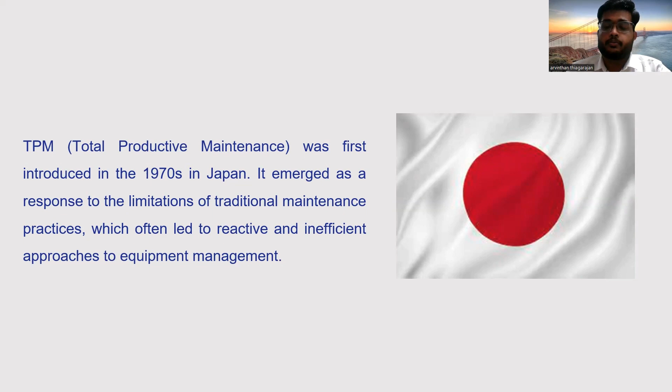TPM, total productive maintenance, was first introduced in the 1970s in Japan. It emerged as a response to the limitations of traditional maintenance practices, which often led to reactive and inefficient approaches to equipment management, causing inefficiencies in production processes.

TPM gained prominence as a key element of the Toyota production system, renowned for its lean manufacturing principles. One of the early adopters of TPM was Nippondenso, now known as Denso Corporation, an affiliate of the Toyota Group. Nippondenso played a pivotal role in developing and implementing the concept of TPM in its manufacturing facilities.

They adopted the concept of TPM, which replaced their traditional methods, and this concept gained several advantages for the Toyota Group of companies, which saw increased efficiencies. This TPM concept was then renowned by many other markets in Japan, causing increased efficiency in their business, which made many parts of Japan adopt this concept, which was then also adopted globally. The methodology spread across various Toyota Group companies, eventually gaining traction and recognition worldwide.

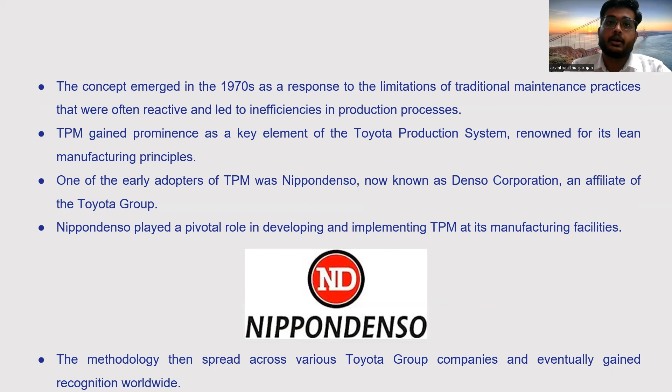So what is total productive maintenance (TPM)? Let me dive deeper into the concept. TPM is a comprehensive approach to equipment maintenance that aims to maximize the efficiency and effectiveness of production machinery. Its primary objective is to eliminate losses related to equipment and machinery by fostering a proactive and participatory maintenance culture throughout the organization.

TPM involves participation of all levels, from top level to the down level, where every individual plays a key role. Instead of relying solely on specialized maintenance teams as in traditional maintenance practices, TPM involves all members of the organization in equipment upkeep, from top management to shop floor operators. It includes everyone, not only a particular group or particular players in the company. This approach aims to create a sense of ownership and involvement at all levels, fostering a collaborative effort to enhance equipment reliability and effectiveness.

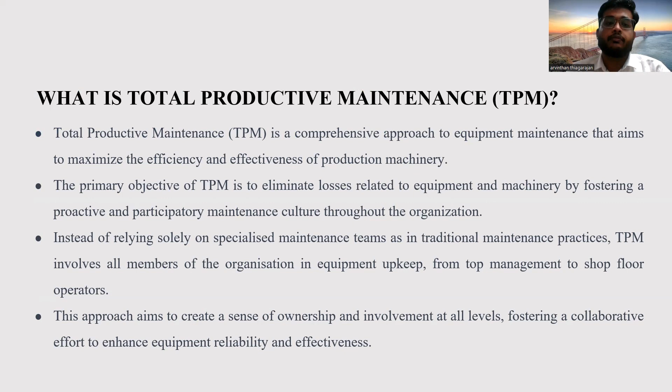TPM is structured around 8 pillars, each addressing specific aspects of equipment management, which will be explained by my other group member. Organizations that successfully implement TPM often experience a range of benefits, including increased equipment reliability, improved product quality, reduced downtime, improved employee morale, and many more.

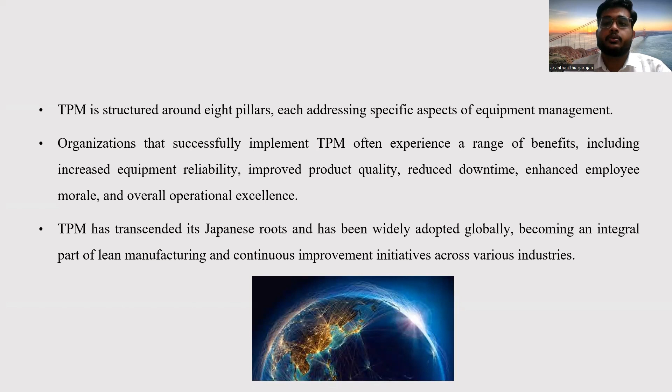TPM has transcended its Japanese roots and has been widely adopted globally, becoming an integral part of lean manufacturing and continuous improvement initiatives across various industries. TPM has spread globally. So what are the basic, key, fundamental benefits of TPM?

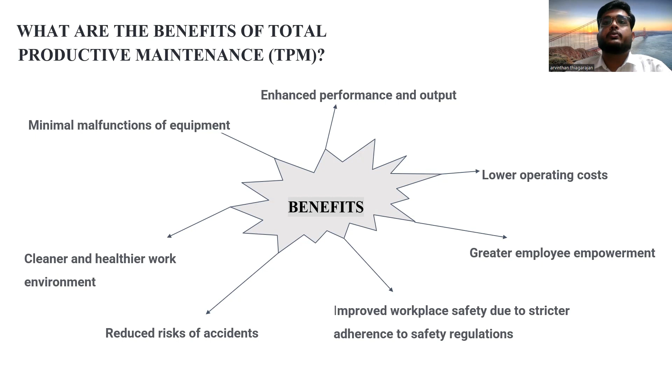First is enhanced performance and output. Second, low operating costs, greater employee empowerment, improved workplace safety, reduced risk of accidents, a clean and healthier work environment, and finally, it renders minimal malfunctions of equipment. These are the benefits of approaching the company with the TPM approach. That's all for now, I would like to pass my presentation to other group mates.

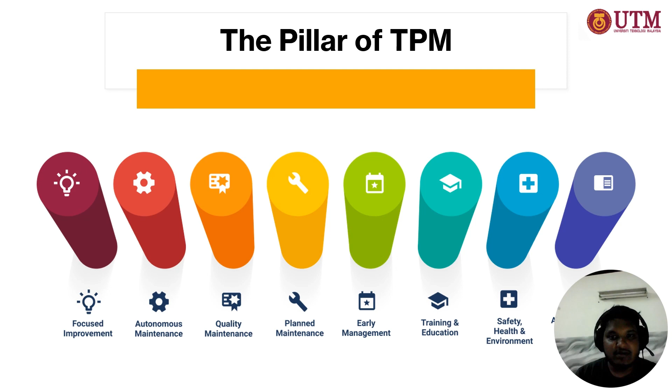Focused improvement is to avoid the loss of equipment, talent, raw materials, and energy. The whole team must share the same vision and be proactive, willing to try new methods. The activities of focused improvement are to identify the losses, calculate and set targets for OEE and unit resource consumption, analyze problems and review possible causes, and pursue focused improvement to achieve the ultimate performance of the production system.

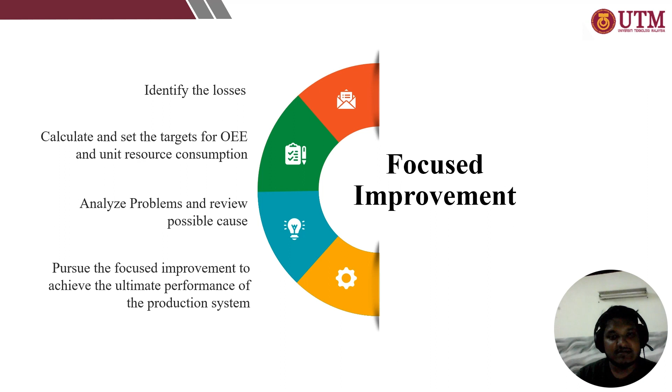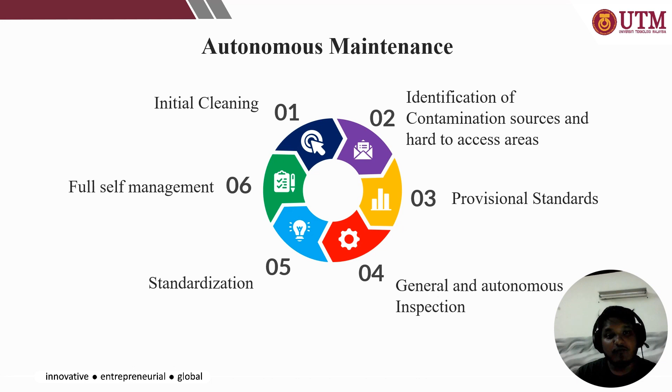The second pillar of TPM is autonomous maintenance. Everyone has the autonomy to clean, inspect, and contribute to the upkeep of the asset they work with. This ensures every piece of equipment is cared for, improves early fault detection, and frees maintenance technicians for heavier tasks. Activities for autonomous maintenance include initial cleaning, identification of contamination sources and hard-to-access areas, provisional standards, general and autonomous inspection, standardization, and lastly, full self-management.

The next pillar of TPM is quality maintenance. One of TPM's biggest goals is manufacturing zero defect products, which undoubtedly also plays a role in customer satisfaction. The activities for quality maintenance are: check the quality characteristics and standards, investigate existing quality defect phenomena and results, check quality assurance conditions prevailing in process, raw materials, equipment, and methods, identify, analyze, and improve unsatisfactory conditions, set observable standards, and monitor trends.

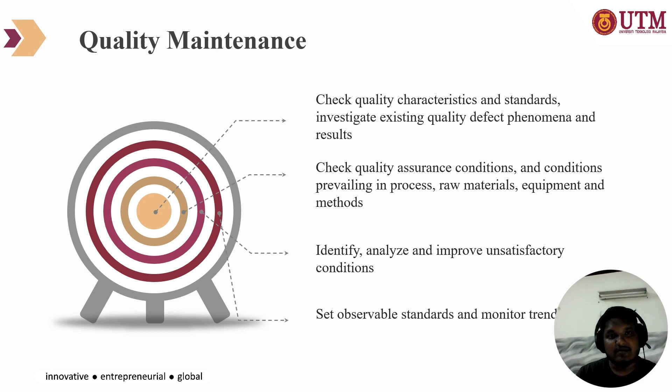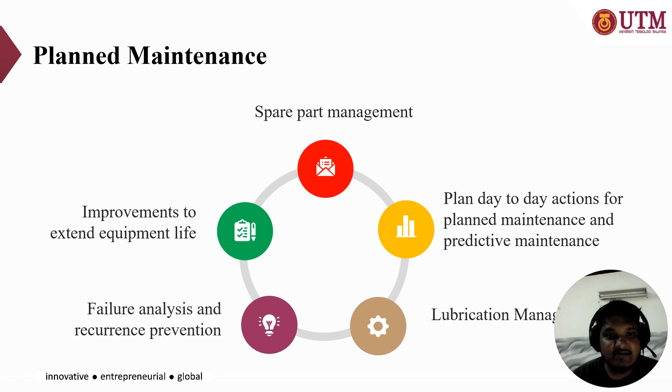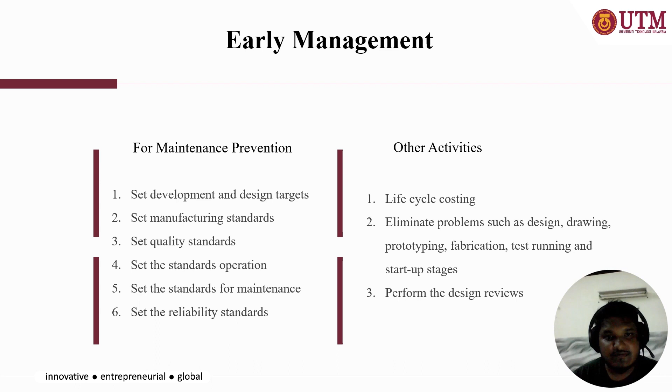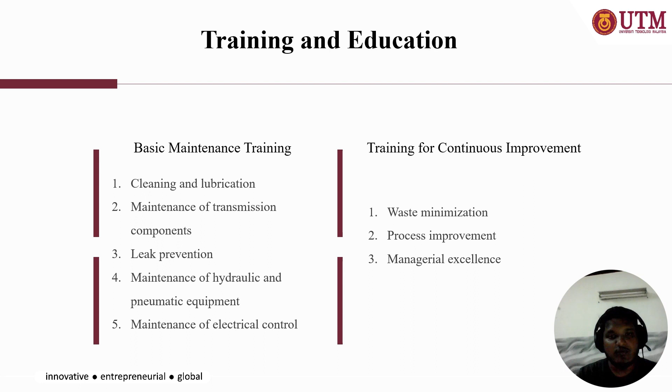TPM requires investing in training and education. Otherwise, it is impossible to trust each worker with routine maintenance or prevention. Activities in basic maintenance training include cleaning and lubrication, maintenance of transmission components, leak prevention, maintenance of hydraulic and pneumatic equipment, maintenance of electrical control, and training for continuous improvement includes waste minimization, process improvement, and lastly managerial excellence.

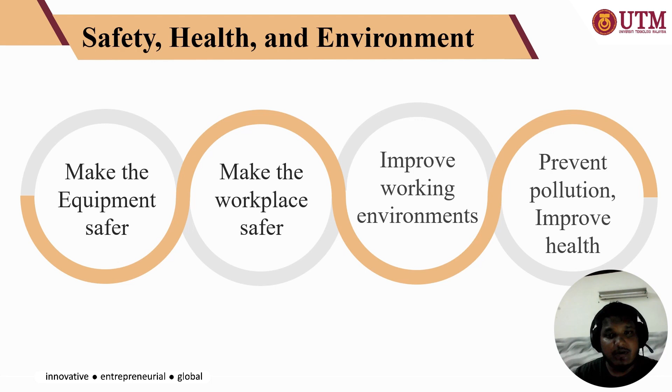The next TPM pillar is safety, health, and environment. TPM also aims at zero work accidents, zero pollution, and zero burnout. Good maintenance management not only avoids accidents during maintenance activities but also contributes to every worker's well-being and safety. Activities include making the equipment safer, making the workplace safer, improving working environments, preventing pollution such as air, water, and noise, and improving worker health.

The core elements of OEE are availability, performance, and quality. These elements help assess the efficiency and effectiveness of the manufacturing process. Availability measures the actual production time of the equipment compared to the planned or scheduled production time. It takes into account factors such as equipment breakdown, changeovers, and any unplanned downtime. The formula for availability is operation time over planned production time, times 100.

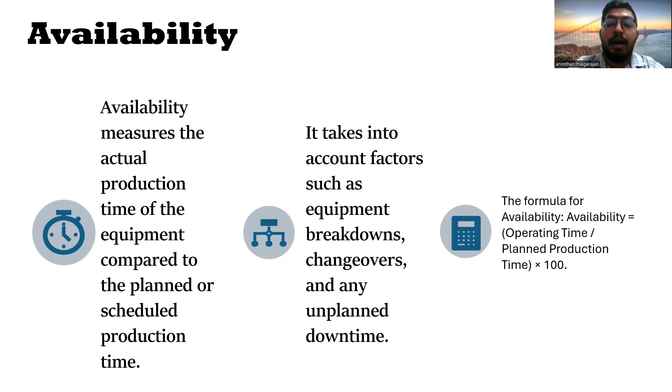Next, we're going to see performance. Performance evaluates how well the equipment performs in comparison to its maximum potential speed or rate. It considers factors like machine speed, vibrations, minor stops, and idling that affect the overall efficiency of the equipment. The formula for performance is ideal cycle time over actual cycle time, times 100.

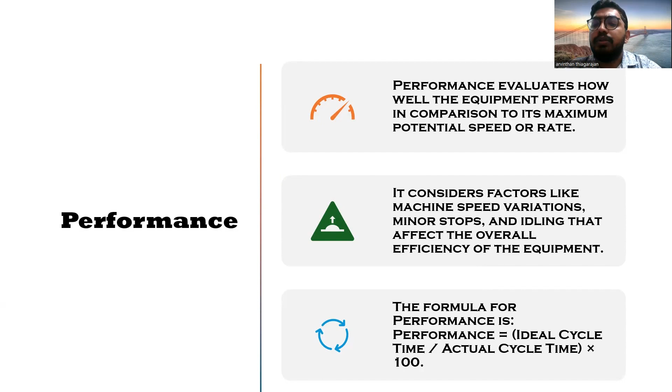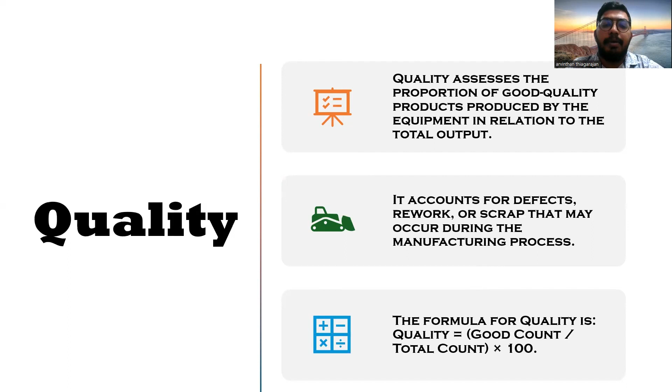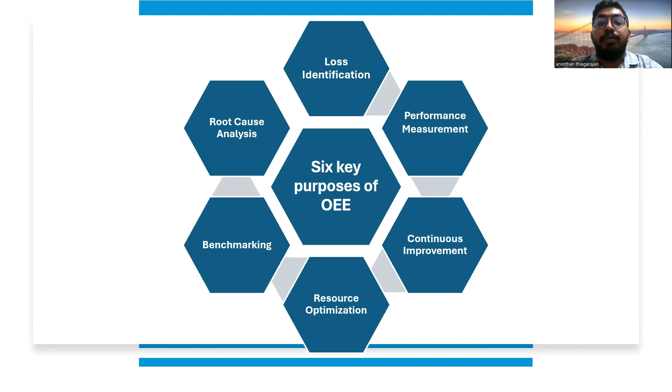For the example, we take a sample from PT Takisha Manufacturing Indonesia. This study has been done from January until December 2015. The location of the study is a production line that uses a stamping machine, and also maintenance and welding. As we can see here, this is the typical calculation of OEE, starting with the availability ratio, the performance efficiency, and the quality.

In general, or on average, we can see here for the availability ratio, the average value is only 83. Whilst for the performance efficiency, for this company for 1 year, the performance efficiency average is only 90, and the quality efficiency, or rate of quality, the average is only 93. So on average for the OEE, we can see that the value of the average OEE is only 69%, which is very low compared to the world class standard, which is 85%.

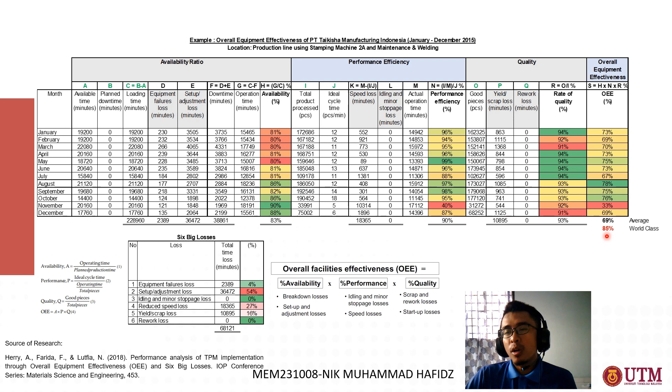Whilst for the scrap loss, it represents 16% of the losses. So, in order for the company to improve the performance of their equipment, it is suggested that they improve hugely in this area and also in performance efficiency. Because if they want to achieve 85%, at every area they have to achieve at least 95%, so that they can achieve 85% for the overall equipment effectiveness. Okay, that's all.